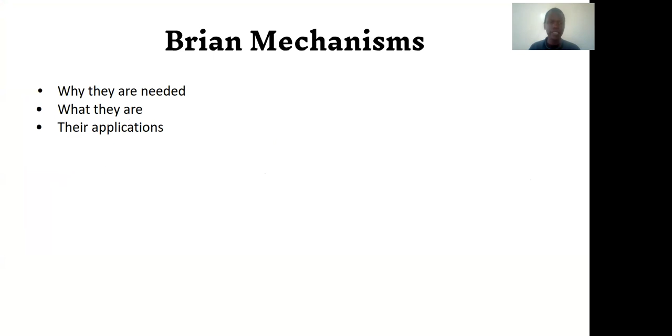Welcome to this session on Brian mechanisms, where we're going to do an introduction and give you some quick examples so that you can learn how to use Brian mechanisms in your own projects with great profit. We're going to see why they are needed, what they are, and their applications.

Brian mechanisms are needed simply so that you can build affordable large-scale robots. The Brian mechanism was actually designed for that particular purpose, for building affordable large-scale agricultural robots. They have the advantage of the precision of fixed robots as well as the range of mobile robots. Combining this into one requires a Brian mechanism, or any other means we still do not know about, but Brian mechanism will do pretty great on that.

If you need to reduce the cost of building robots, and if you need the precision of fixed robots.

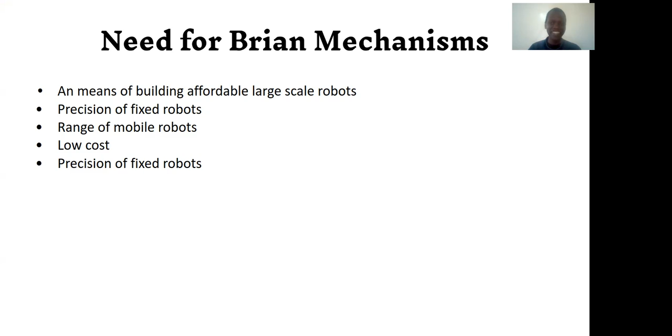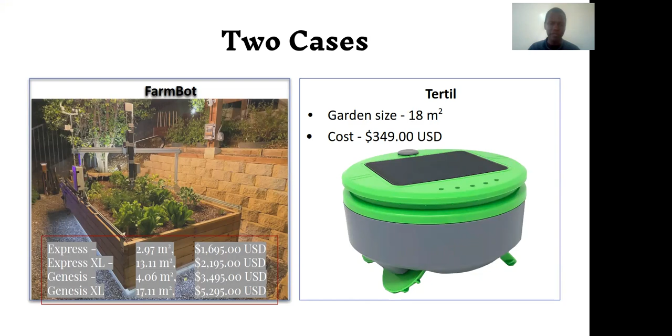Let's consider, for example, these two cases where you have FarmBot, an agricultural robot, and Tertill, a weeding robot, not an agricultural robot. Tertill itself goes for $349 and can work an area of 18 square meters, but it has several accessories that almost double its price. Then we have FarmBot, the cheapest of which can work just 2.97 square meters, but how much does it cost? $1,700 for 3 meters length and 1 meter width. The most expensive, working 18 square meters, is $5,000. Brian mechanism needs to bring a cheap robot.

Some trade-offs that you have is precision. We will see this thing about precision because we say we need the precision of fixed robots, but we have to make some trade-offs there.

What are Brian mechanisms? Simply defined, a class of mechanisms for turning fixed robots into compound robots. The main requirement for a mechanism to be a Brian mechanism is that it has to have two parts, a mobile robot part and a fixed robot part, having independent movements, independent control of their position.

The mobile robot part of Brian mechanisms has discrete position, while normal mobile robots have continuous position. So for a Brian mechanism robot, the mobile part, you tell it come from 0 to the next position, which may be 1 meter, but it's not continuous. Well, it goes through that continuous motion just so it gets to the intended location. Then the position of the payload of the Brian mechanism is only partially dependent on the position of the mobile robot part. This is captured in point 2.

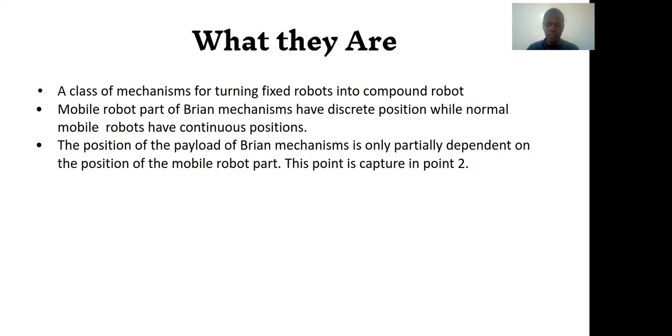Now let's get to the interesting part where we have examples and implementation. We will give you 4 examples. One uses a non-circular wheel to achieve intermittent motion, one uses a back flipping frame, and one has 4 legs, 2 on one side and 2 on the other. Then there's the last one, the most practical, the one actually being used to build robots at the moment, which uses a chain.

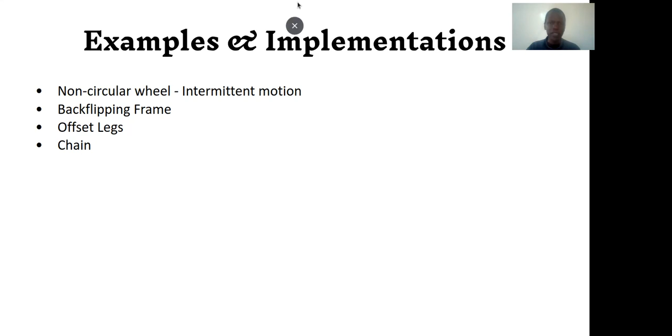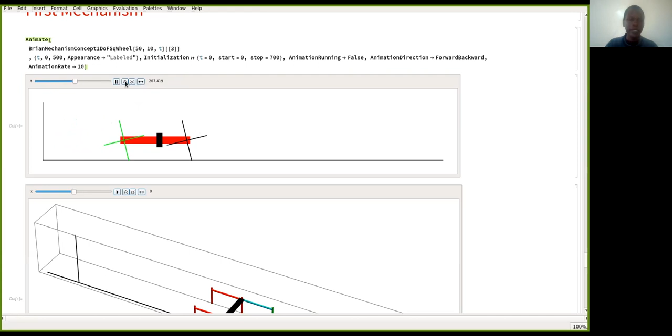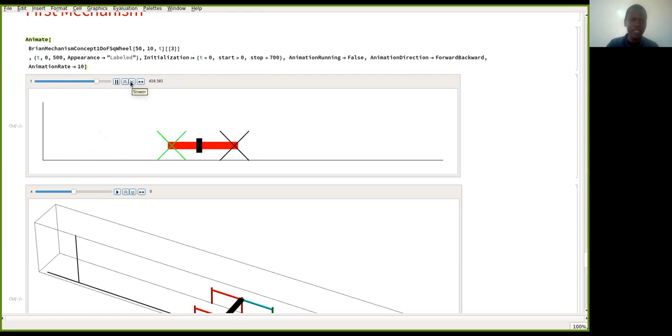The issue that you will have with this is that the payload is being raised up and down. It's not a very efficient mechanism when you use that non-circular wheel.

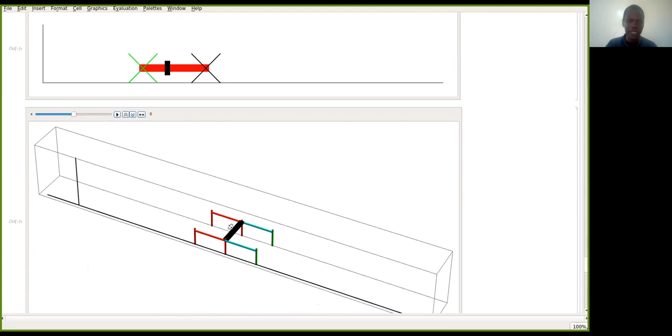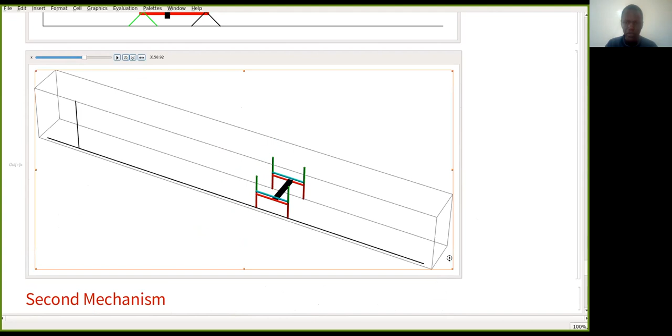And then there's a back flipping frame. Again, black is the fixed robot, the rest forms the mobile robot. So if we are to see its movement, then we see how it moves. There are two frames that form the mobile robot, and they carry the fixed robot. So the fixed robot moves, and the mobile robot backflips, so that there can be continuous motion of the fixed robot. I'm going to increase the speed of this so we can see it going back as well.

And then the third one, which we do not have a model and simulation for, is the one with 4 legs, 2 set on one side and 2 on the other. We do not have an illustration for that at the moment, but what we have is what is practically being used, and it is a patented design.

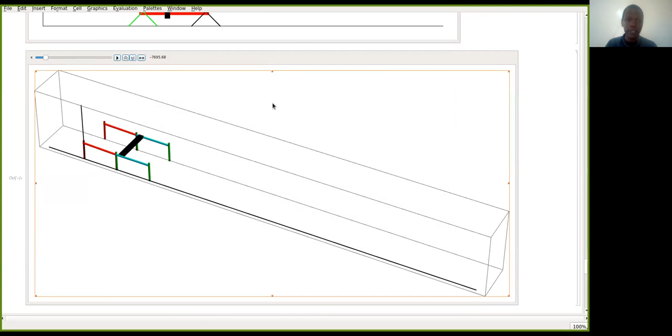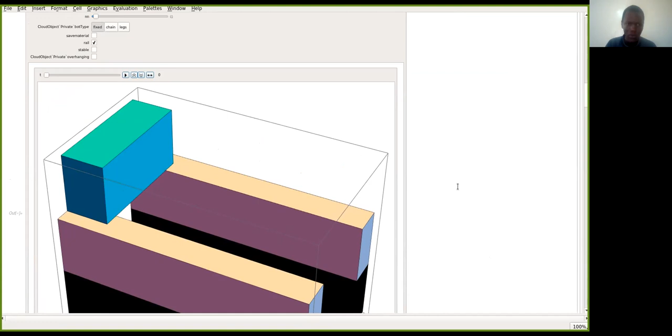Now, trying to reduce the cost. If we had a fixed robot moving on some rail, for example an aluminum extrusion, how would we reduce that cost? We can try saving material. This removes the excess material that we do not need, while making sure our calculations are right so we don't interfere with the structural integrity.

If you had the whole material, it is clear that in most cases we don't really need all of that, so we can remove some and we have it this way.

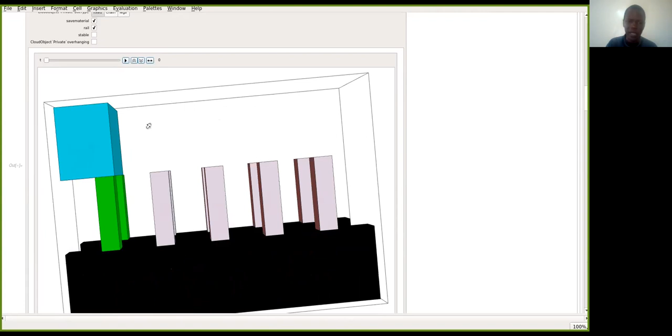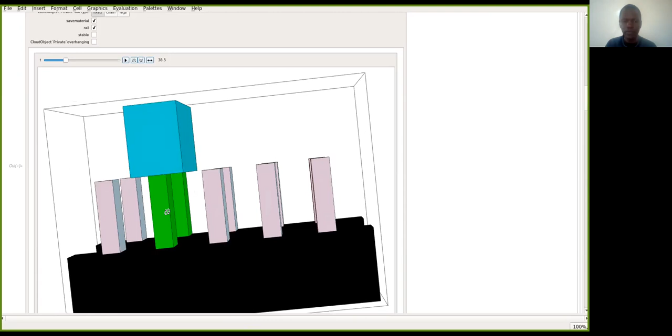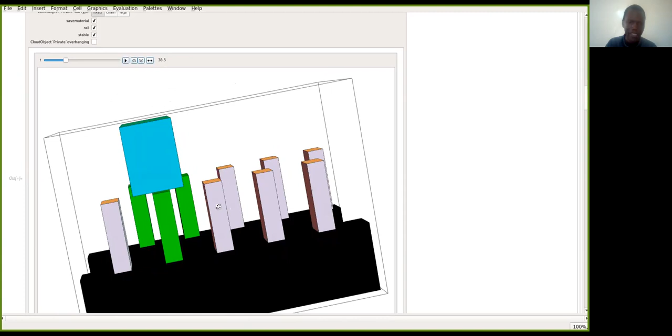But now you see, if we do this, our fixed robot will be supported here, not being very stable, because sometimes it's only supported by 2 legs, if we call them legs, the green, 1 and 2. But we can also try something to increase its stability. So we've offset the other legs by half the distance between 2 successive legs, so that at any one point it is supported by 3 legs.

So we have the 3, and then the next 3, etc. And this is the concept you have, the 4 legs of the set. It should be showing us something.

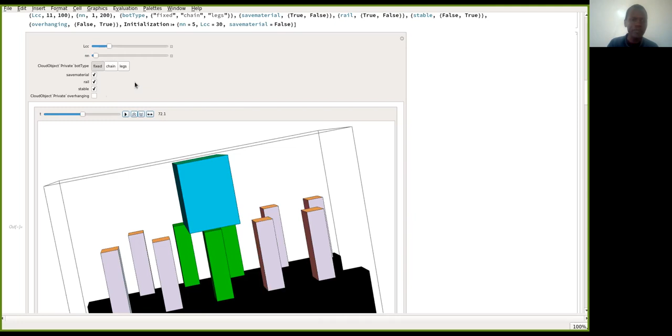If we remove the rail, so now it's just a robot, we have this leg here, and this is another leg. As the robot moves forward, this leg moves from this position to the next position, so that by the time the robot gets there, that leg is in that position.

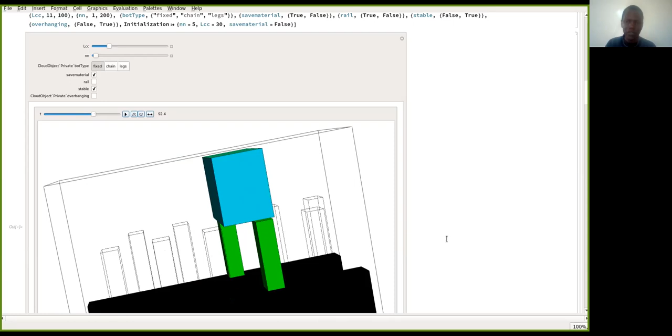As it continues moving, once it has passed this leg that is here, this leg should be carried from here to the next position. So we have a walker, but one that we're able to achieve with much greater precision.

This is now the last example we're giving, a practical example. This is actually the model of a robot. Let's make it walk so that we see how it works as we make it walk back and forth.

Much slower, Mr. Robot. So there, but clearly you can see that there are points where it will not be able to be supported. Like at this point, I believe it's only 2 legs down. It will not have sufficient stability.

So we can increase the number of sets of legs. Each set has 3 legs. So the first set on each side, 1, 2, and 3.

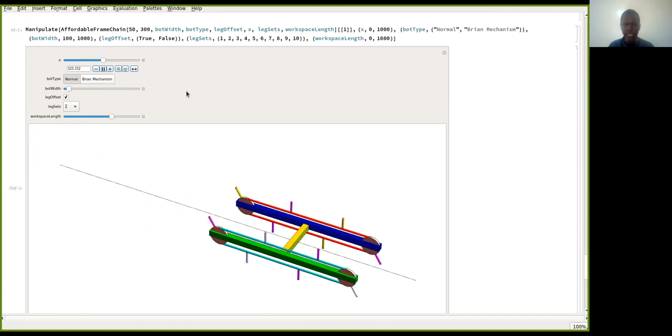If you put in 2 sets, then you have how many? That's 6: 1, 2, 3, 4, 5, and 6. Then you can make it walk, and you see that at any point there are at least 4 legs supporting it, and that gives it sufficient stability. For simplicity, that is what we prefer, but you can go on and on with as many legs as you want.

But then this robot can also turn into a Brian mechanism. So when you want it to go fast, you let it just walk around like that, or move around like that, or roll around like that. However, that motion may be called what a normal mobile robot will do.

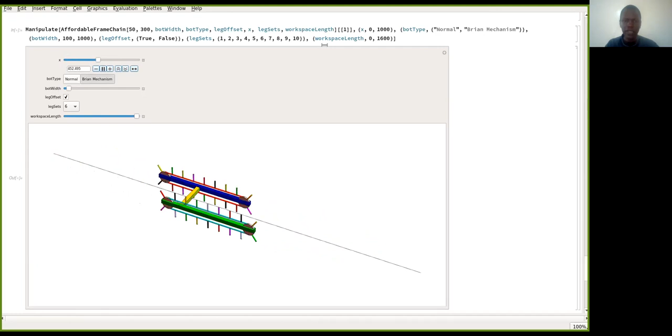We have a design that uses a lead screw, another one that uses a tooth belt, so we can achieve the precision of a lead screw with that.

So with those examples, let's get to the uses of the Brian mechanism. Currently we know of one use: we are the ones using it in designing what is going to be the world's cheapest agricultural robot.